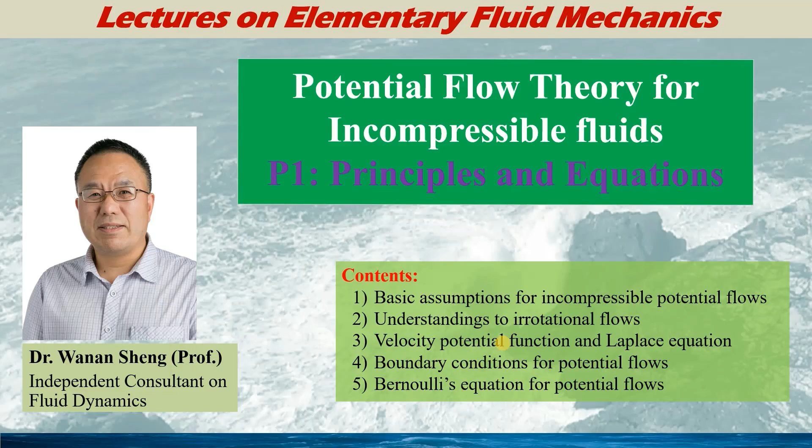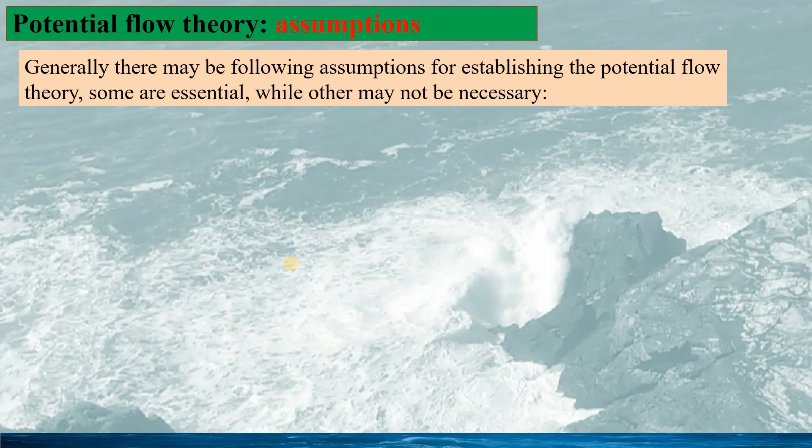Generally, for building the potential flow theory, there are three assumptions. Some are essential, while others might not be necessary, depending on the situation. The first and the most important assumption is that the flow is irrotational, or, in other words, the flow has no circulation around any closed curve within the fluid.

The assumption for irrotational flow is given by the curl of the flow velocity vector is 0. And this will also lead to a velocity potential function, from which three velocity components would be degenerated to a scalar function, phi. The second assumption is the flow is inviscid.

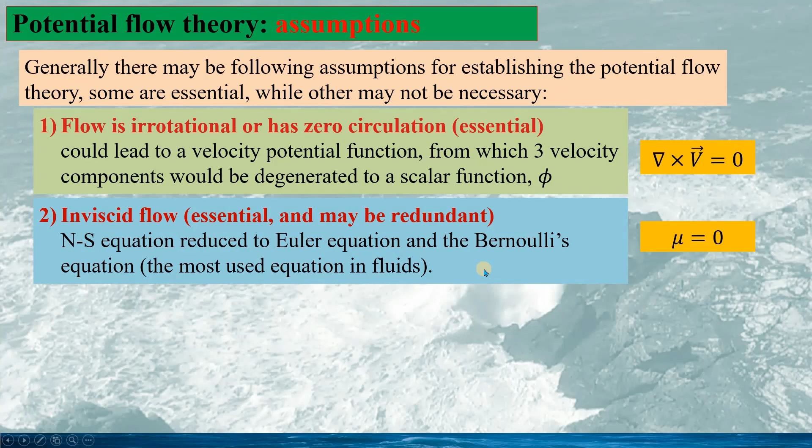This is essential, but this is also redundant, since when we assume the flow is irrotational, that means the flow is inviscid. For inviscid flow, the simple expression would be the fluid viscosity mu is 0. Therefore, the Navier-Stokes equations would be reduced to the Euler equation, as well as the Bernoulli's equation, as an integral form of the Euler equation. Bernoulli's equation is the most used equation in fluids.

And we may need to assume the flow is incompressible. The mathematical expression for incompressible flow would be given as the divergence of the velocity vector v is 0. This is only applicable when the flow velocity is not very high, and this assumption would lead to the Laplace equation for the velocity potential function. We will see the details on this.

Here, I must emphasize this is not an essential assumption, since in high-speed potential flows, the flow can be compressible. I will make a talk on that in the future.

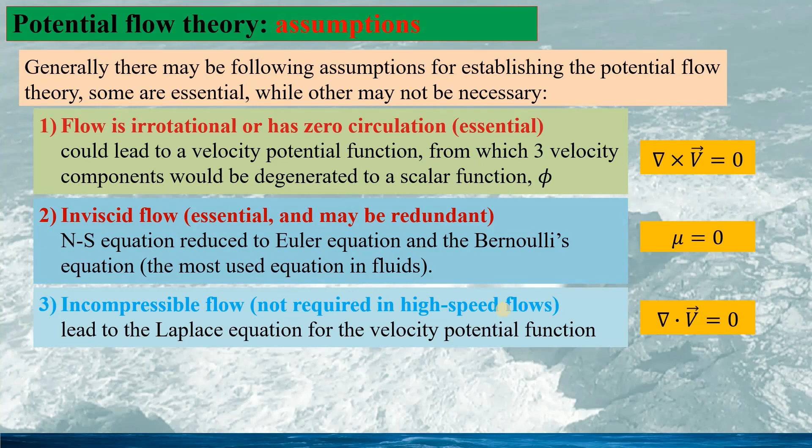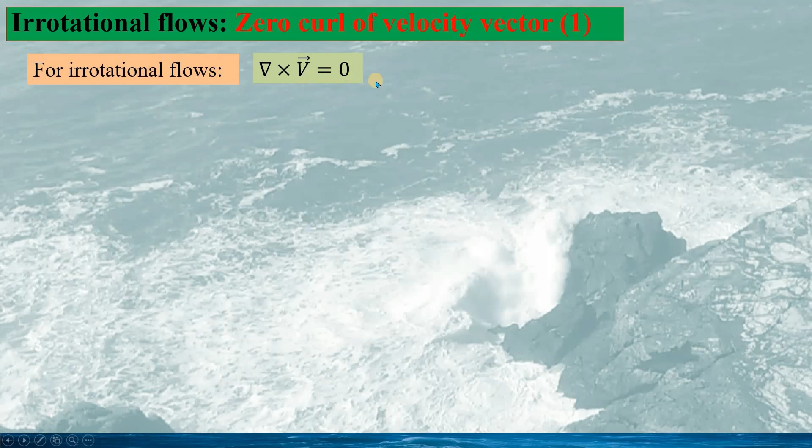Based on the assumption of irrotational flow, the curl of the velocity vector is 0, given as this. And we can calculate the curl of the velocity vector given as this determinant. Here, the unit vectors i, j, k are the unit vectors along the x-axis, y-axis, and z-axis respectively. And the detailed calculation of this determinant would be given as this.

That means the curl of the velocity vector is still a vector. We have three components around the x-axis, y-axis, and z-axis. See here the unit vectors. So the component around the x-axis is this, the component around the y-axis is this, and around the z-axis this. To make this vector 0, we need to make all three components 0. Thus, we have three equations. See this.

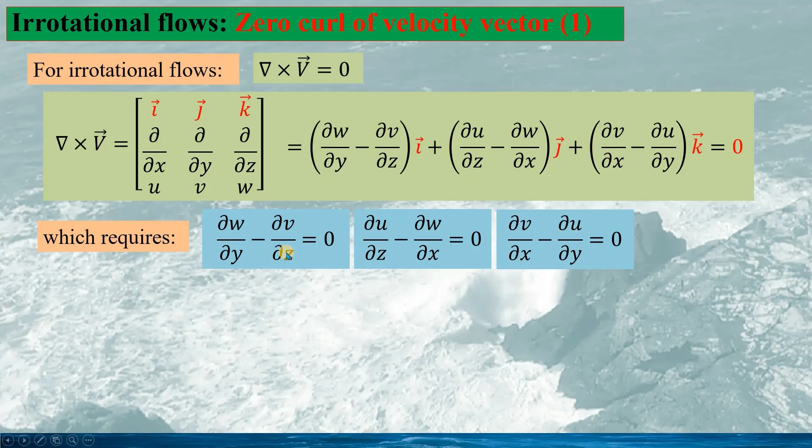So we can see, by assuming the flow is irrotational, the three velocity components u, v, and w are no longer independent of each other, but linked by these equations. Here we can also see, for three velocity components u, v, and w, we have three equations. Can we say these three equations are complete for these three velocity components? To answer this question, we will see the irrotational flow in the 2D case in the next slide.

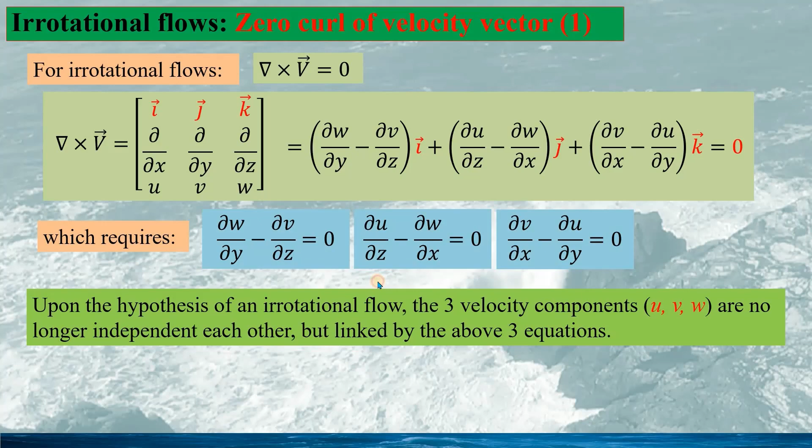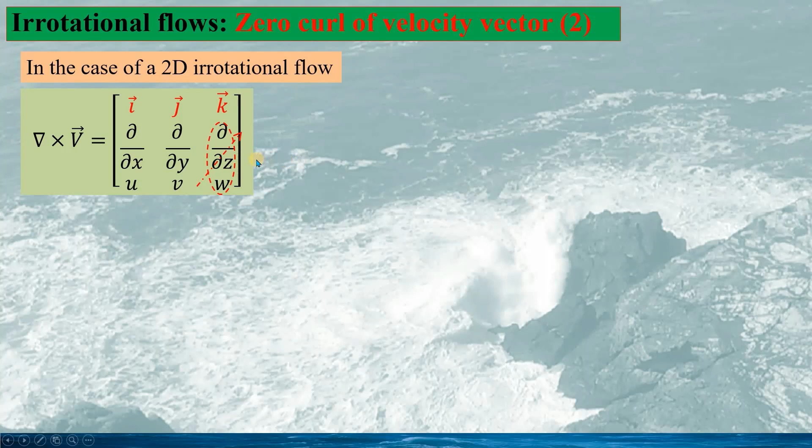In the 2D case, the calculation of the curl of the velocity vector is still given as this, but we must take the velocity component w as 0, and the partial differentiation with regard to z would be 0 too. If we look at this detailed calculation of the curl of the velocity vector, this part would be 0 because w is 0, and this would be 0 too because of the partial differentiation with regard to z. Similar for this and this.

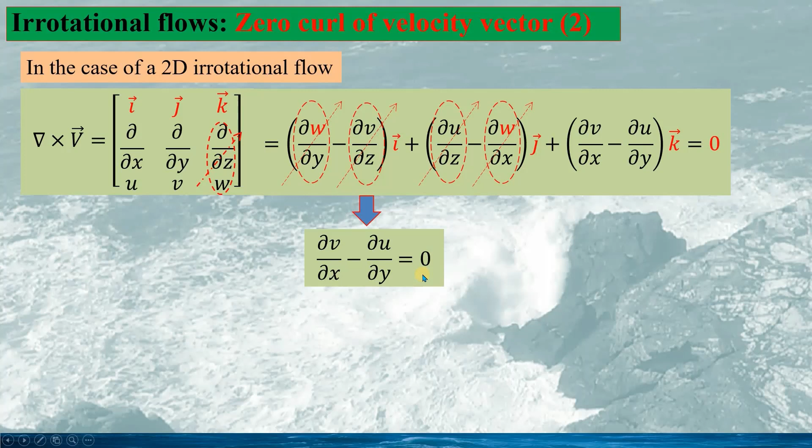Therefore, in the curl of the velocity vector, in the 2D case, only the component around the z-axis is non-zero, given as this. Therefore, to make the curl of the velocity vector 0, we need to make this component 0, given as this. So in the 2D case, we have two velocity components, u and v, and they are no longer independent of each other, but linked by this equation.

Here, we can see we have only one equation for two velocity components. That means to solve the velocity components in 2D irrotational flow, we need an additional equation to make the system complete. This would be different from the 3D case, where we have three equations for three velocity components.

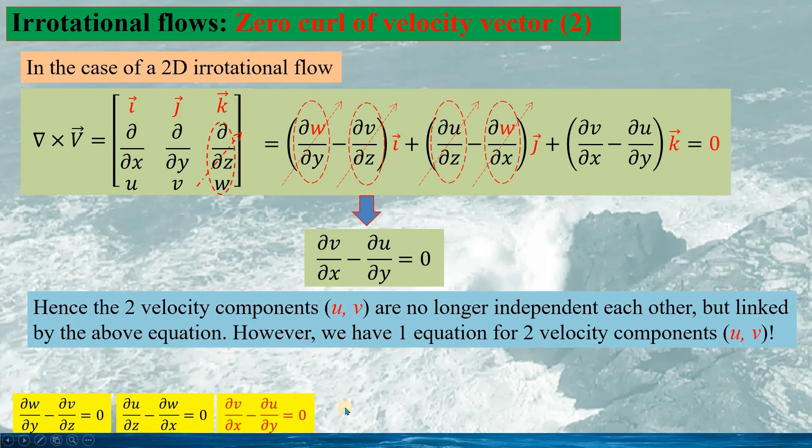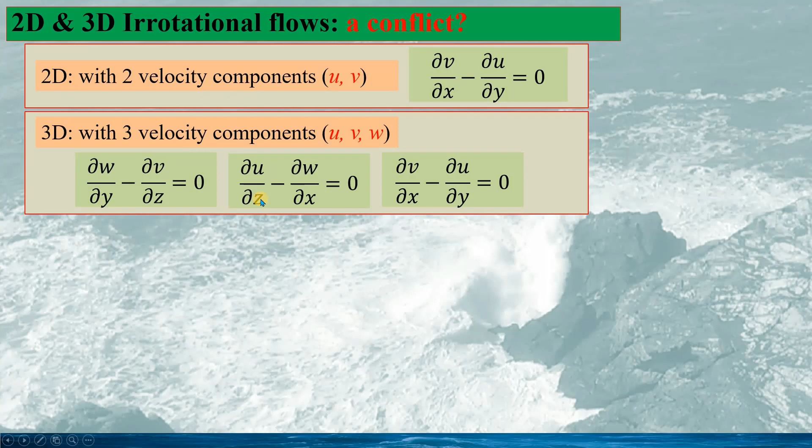So we can see a conflict between 2D and 3D irrotational flow. In 2D, we have two velocity components, u and v, but only one equation based on the irrotational flow assumption. While in 3D, we have three velocity components, u, v, and w, and also three equations from the assumption of irrotational flow.

Therefore, we can see a conflict. In 3D, we have three equations for three velocity components. Can we say this is a complete dynamic system because of three equations for three unknowns? While in 2D, we have only one equation, but we need to solve two velocity components. That means we need an additional equation. Why do we have such a conflict for 2D and 3D irrotational flows?

Here we will show that for 3D irrotational flow, these three equations are redundant. For example, we take the first two equations and write them as this and this. We can calculate the partial differentiation with regard to x, so we have the expression as this. Similarly, for the second equation, we calculate its partial differentiation with regard to y, so we have the equation as this.

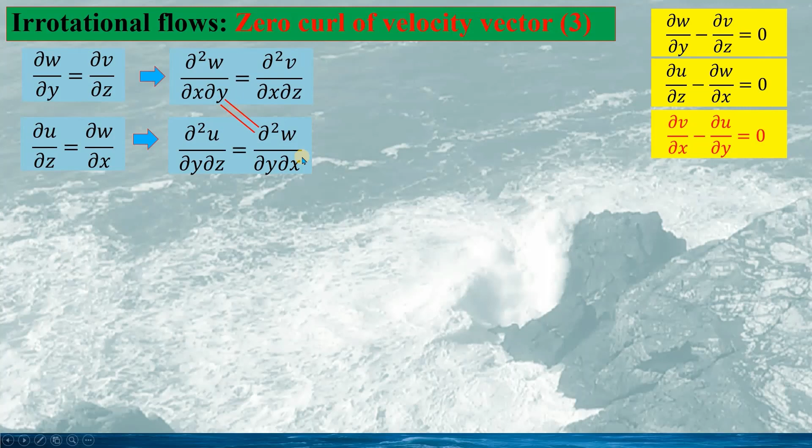Looking at these two equations, we find this term is the same as this term, because the order of the partial differentiation with regard to x and with regard to y is irrelevant. Therefore, these two terms are the same. This means we would have an equation given as this. We can take the partial differentiation with regard to z out of the calculation, and we can have the expression as this.

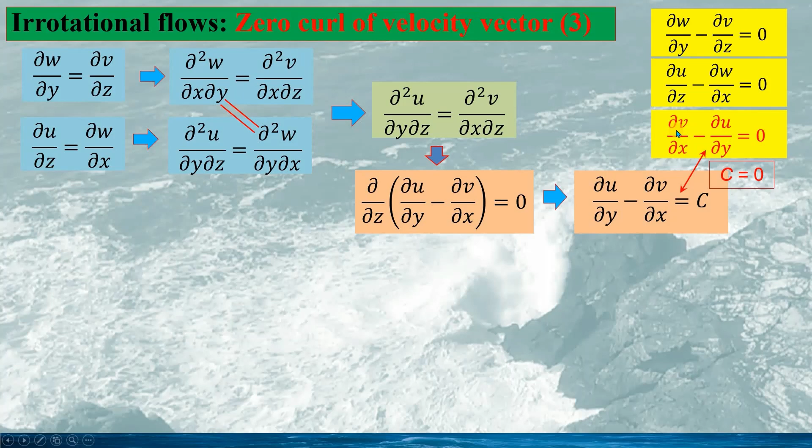We can integrate this into an expression as this. Here, c is an integral constant; it would be independent of z. So if we take c equal to 0 as the special case of this expression, we can see this would be the same as the third equation. That means in 3D irrotational flow, these three equations are not independent of each other.

There's a redundant equation. So in this case, we have only two independent equations based on the assumptions for 3D irrotational flow. To solve the three velocity components, we need an additional equation. This is the same as in the 2D case, and we will see the additional equation is the continuity equation.

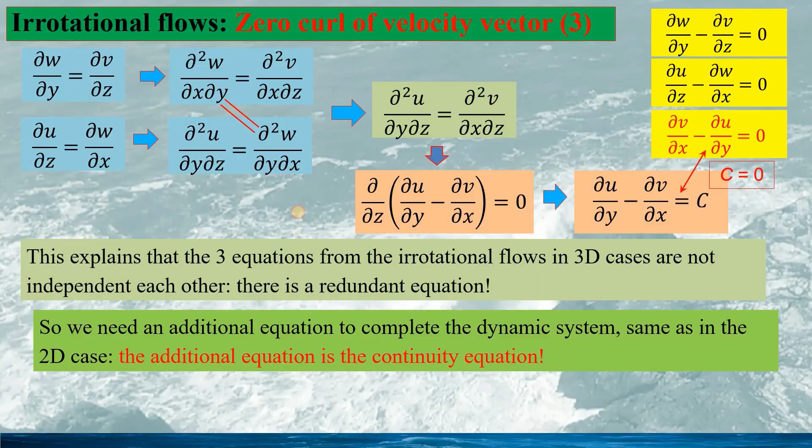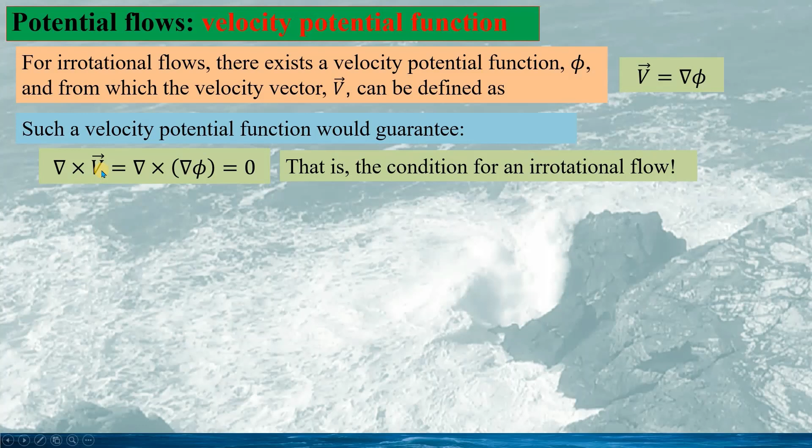For irrotational flows, there exists a velocity potential function phi, from which the flow velocity vector V can be calculated as the gradient of the velocity potential function, given as this. The simple reason for such a velocity potential function is that if we calculate the curl of the velocity vector, we have the expression as this, which is identically 0. This is a simple proof, for an irrotational flow, of the existence of a velocity potential function.

In Cartesian coordinates, the three velocity components can be given by the partial differentiation of the potential function phi with regard to x for the velocity component u along the x-axis, the velocity component v along the y-axis, and the velocity component w along the z-axis. Thus, we can see the first advantage of irrotational flows: the three velocity components u, v, and w are reduced to a single scalar function, the velocity potential function phi.

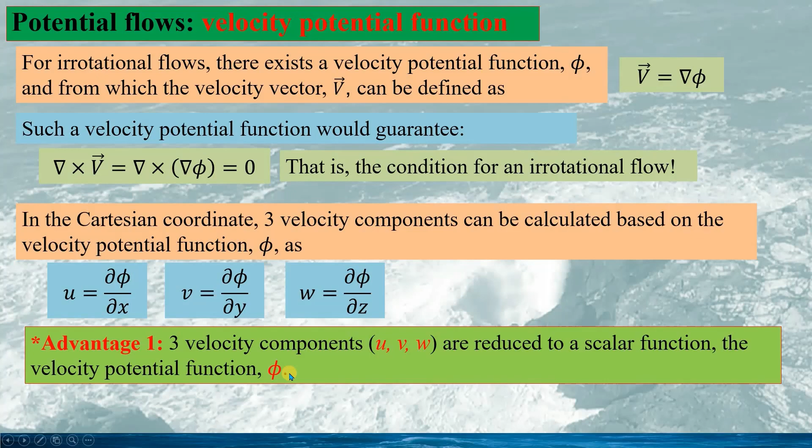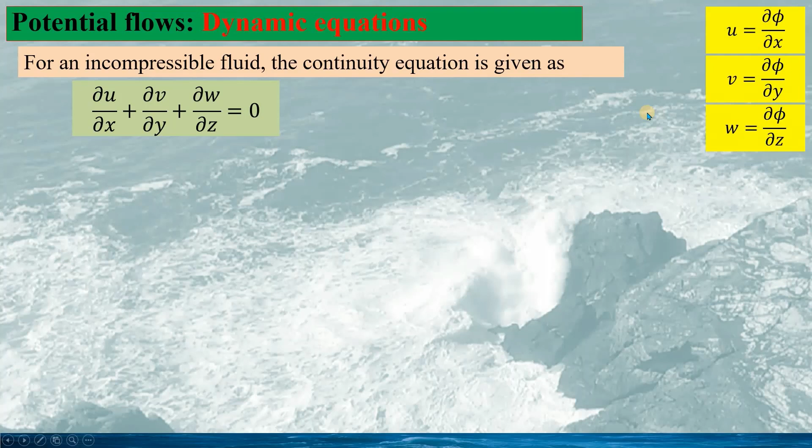Now we consider incompressible flow. The continuity equation is given as this: the divergence of the velocity vector is 0. If we substitute the velocity components from the velocity potential function into this continuity equation, the first term of the continuity equation becomes this, the second term becomes this, and the third term this. Therefore, we have the new equation for the velocity potential function phi given as this.

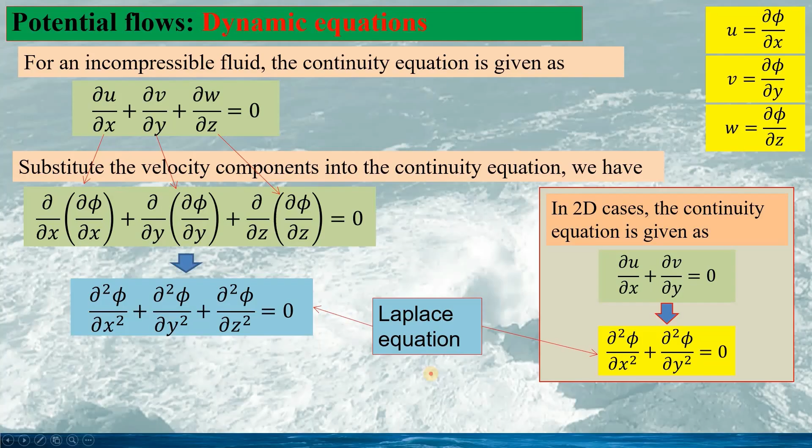If we consider 2D irrotational flow, the continuity equation is given as this, and the corresponding equation for the potential function is given as this. These are the Laplace equations for 3D flows and 2D flows. If we use the Laplace operator, the Laplace equation can be more simply expressed as this. Here, the Laplace operator is given as this, that is, the Laplace equation as this. In the 2D case, the Laplace equation would be given as this.

Thus, we can see that for potential flows, the dynamic equation, the Laplace equation, can be obtained from the continuity equation. Here we have the second advantage of potential flows: the dynamic equation for incompressible potential flows is a linear partial differential equation, the Laplace equation for the velocity potential function phi.

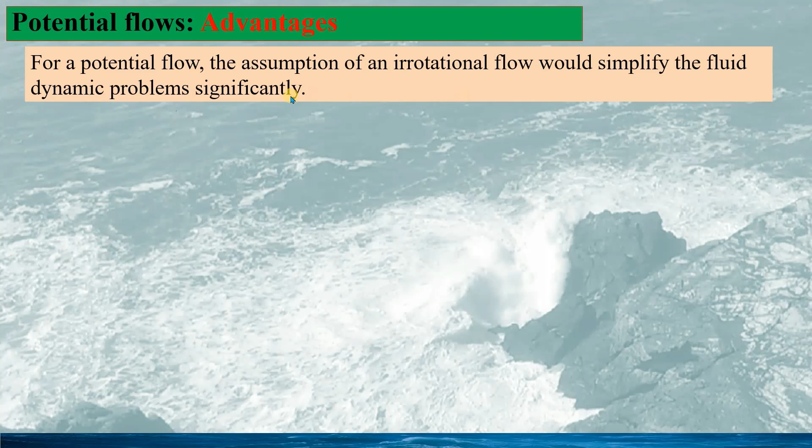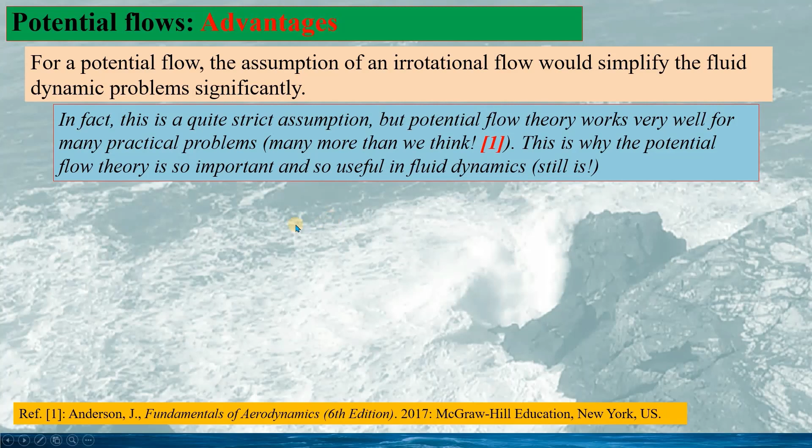As we have seen from the previous slide, for a potential flow, the assumption of irrotational flow simplifies the flow dynamics problem significantly. Based on the reference, we can see the assumption of irrotational flow is a very strict assumption, but it works very well for many practical problems, many more than we think. This is why potential flow theory is so important and so useful in fluid dynamics. It still is, and this was especially true before computers were used for solving the Navier-Stokes equations.

As we have mentioned, with the assumption of irrotational flow, the velocity components u, v, w are reduced to a single scalar function. So the advantage is 3 partial differential equations versus 1 partial differential equation. And the dynamic equation is a linear equation for incompressible flows. Thus, we have the advantage if we compare the nonlinear partial differential equations, the Navier-Stokes equations, with the linear partial differential equation, the Laplace equation.

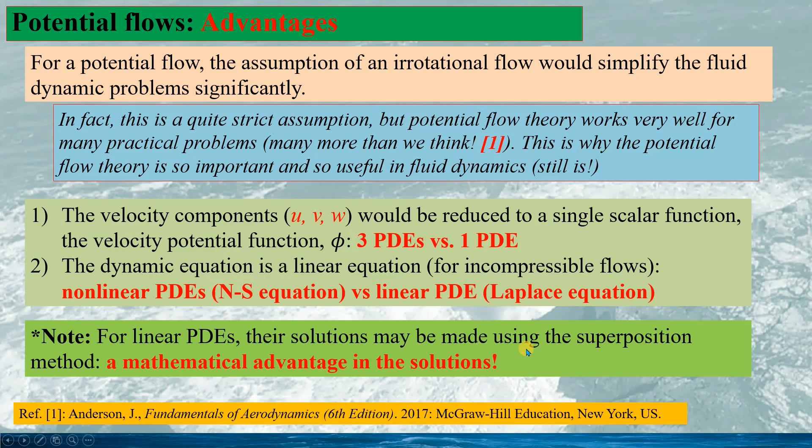Also, for linear partial differential equations, solutions can be made using the superposition method. This brings a huge mathematical advantage in solving the dynamic equation.

In the previous slides, we already built the dynamic equation for the potential flow. To solve the dynamic equation, the Laplace equation, we need to specify the boundary conditions for the problem. This includes the kinematic boundary condition, for instance, to specify the fluid velocity on the boundaries.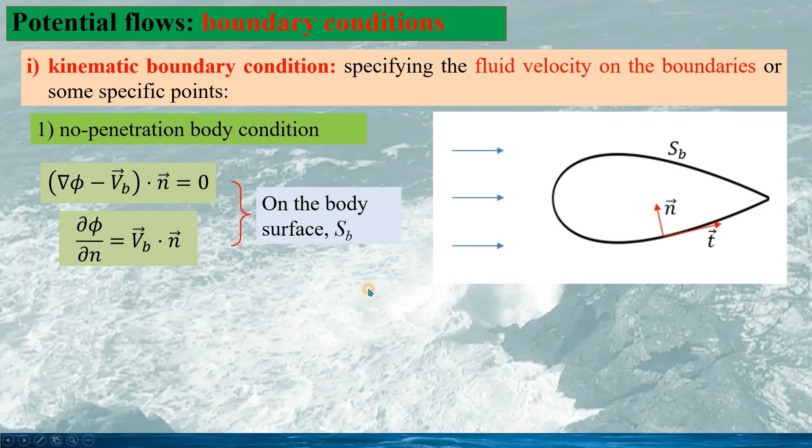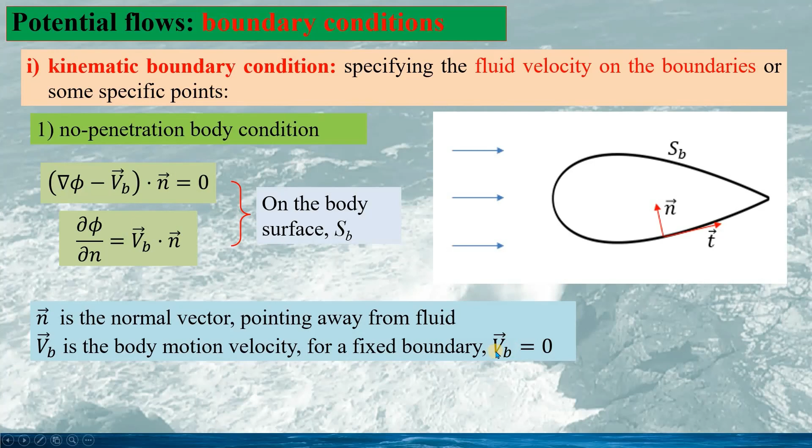Here, n is the normal vector pointing away from the fluid, and the vector Vb is the body motion velocity. If the structure is fixed, then the body motion Vb would be 0, given as this.

The second kinematic boundary condition is for the lifting body, so we need to specify the velocity at some specific point. For instance, the Kutta-Joukowski condition for lifting bodies. At the trailing edge, see here, if we have the velocity come from the upper surface of the lifting body and the flow coming from the lower surface of the lifting body, at the trailing edge we have two different velocities, V1 and V2.

Obviously, this is not physical, only when V1 and V2 are both 0. That means at the conventional trailing edge of the lifting body, the velocity must be 0, V1 equaling to V2 equaling to 0.

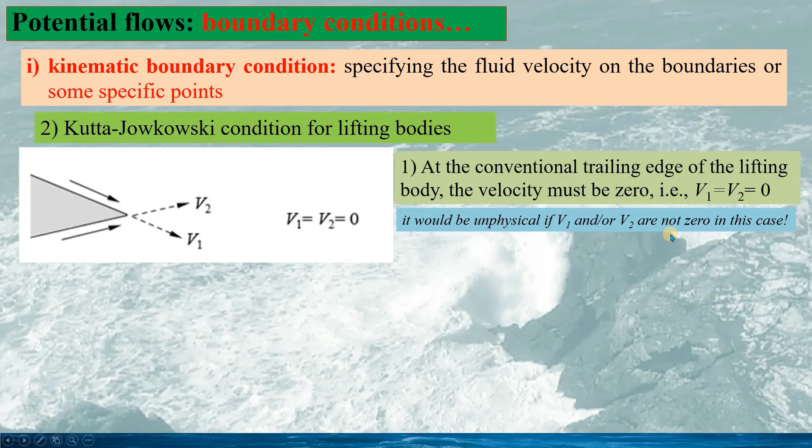However, if the lifting body has a cusped trailing edge, and the velocities coming out from the upper surface and the lower surface are both tangent to the trailing edge, in that case we will have a certain velocity, but V1 must be equal to V2. So the Kutta-Joukowski condition is only used for the lifting body in case the potential flow can generate the lift on the body.

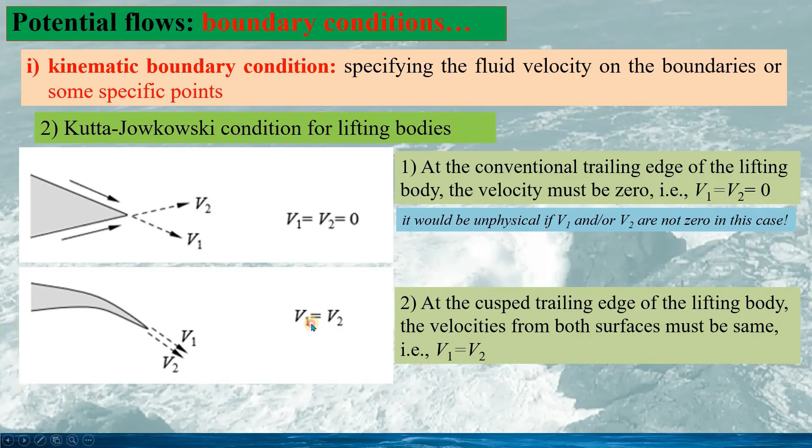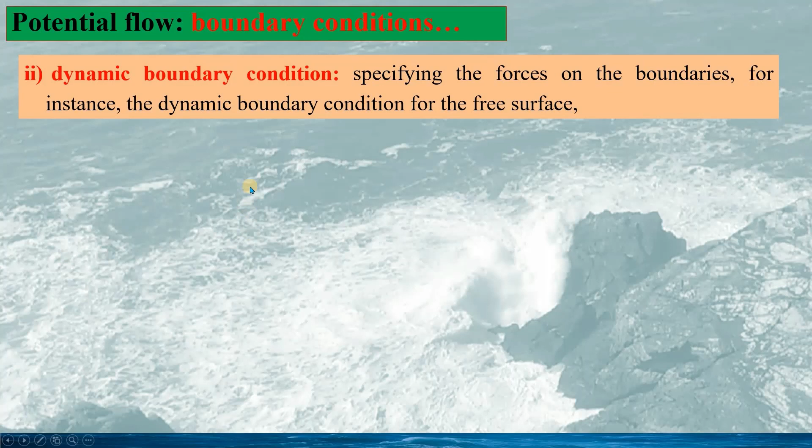And we may also have the dynamic boundary condition. In that case, we need to specify the force or the pressure on the boundaries. For instance, the dynamic boundary conditions for the free surface, like waves. On the free surface, we can define the pressure as P0, the atmospheric pressure at the sea surface. So this is a very useful dynamic boundary condition if we study wave and structure interaction.

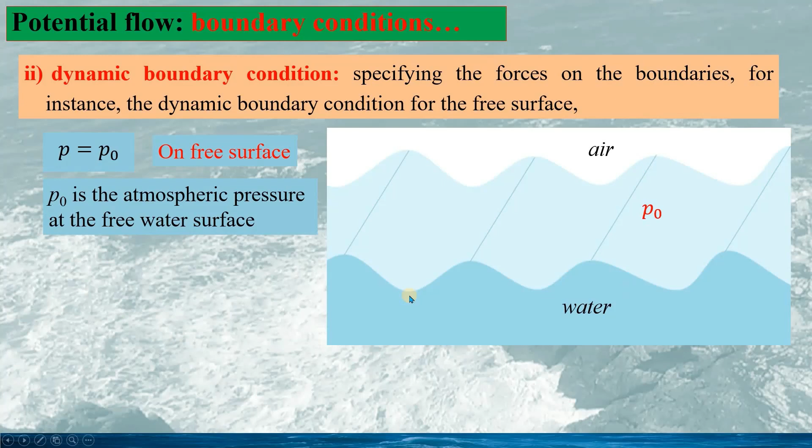Now we will see how the Bernoulli's equation for the potential flow is derived. For the potential flow, the fluid dynamic equation is the Euler equation given as this. This part is the fluid gravitational force, but it is opposite to the z direction, thus the minus sign here. In the derivation of the Bernoulli's equation, this convective acceleration term is the most difficult one.

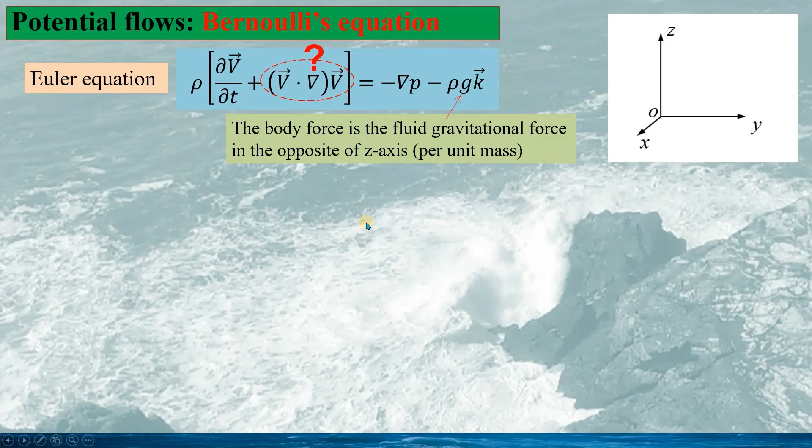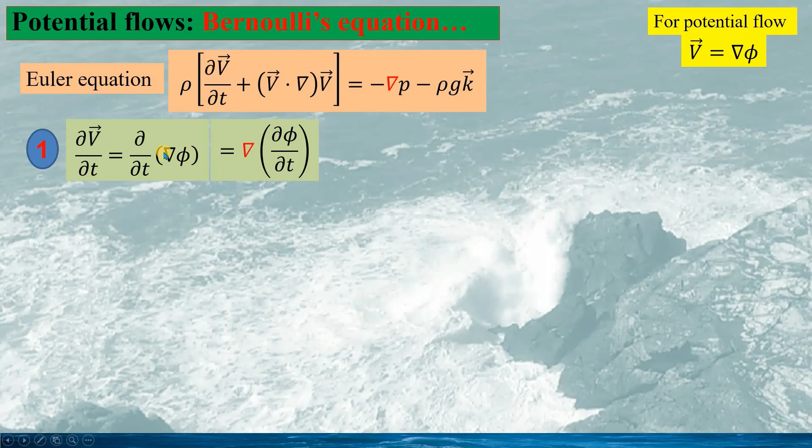Now we can look at each term in the Euler equation. The first term, the local acceleration: if we substitute the velocity vector calculated by the velocity potential function into the expression, we have the expression as this. And we can change the order of the operations, the partial differentiation with regard to t and the gradient. So we have the expression as this.

And in the previous slide, we have already obtained the convective acceleration given as this. So we have the expression as this, the gradient of this expression. And we can also write this into an expression as this.

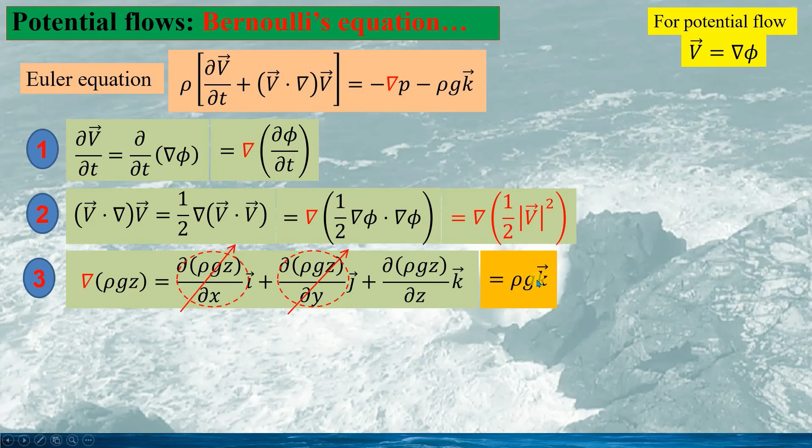And for the body force term, if we take the gradient of the function rho gz, we can calculate this gradient as this. Obviously, this term would be 0 because rho gz is independent of x. Same for this term, rho gz is also independent of y. So we have only one term as this, which gives the result rho g unit vector k.

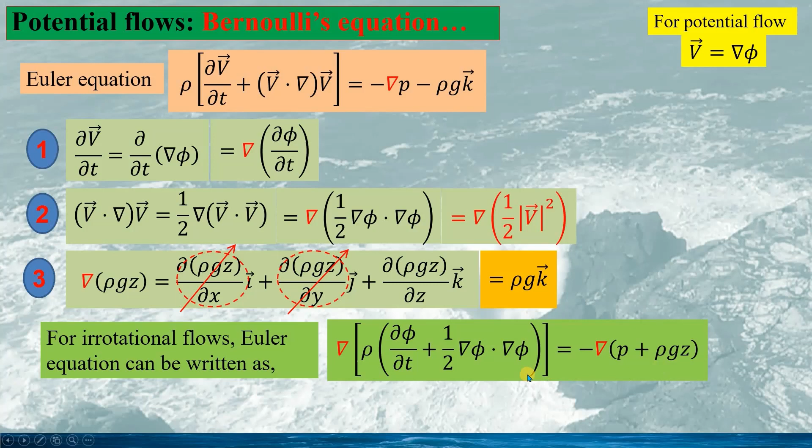So put all this together. For the irrotational flow, the Euler equation can be written as this. And we can see both sides are calculated as the gradient of this expression and the expression as this. Now if we move the term on the right hand side to the left hand side, we have the expression as this, the gradient of this expression.